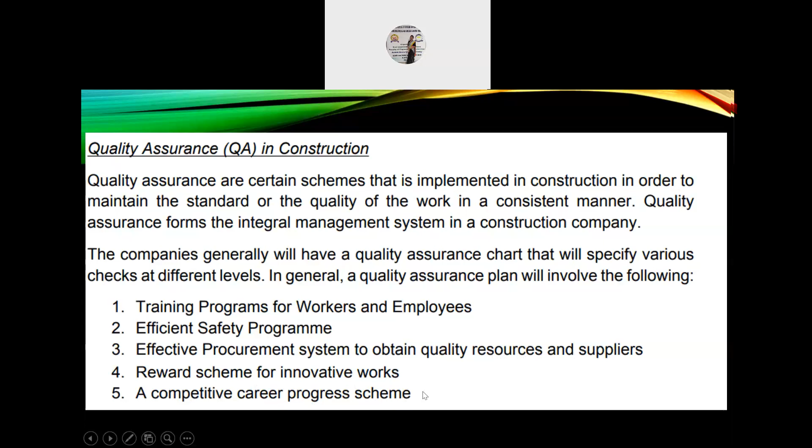Quality control in construction involves periodic inspection of the construction activities and facilities in order to meet the desired standardization as per the contract. Quality control is undergone by the team of QC engineers or specially trained teams. For example, quality control for compaction work conducted for a highway project is performed by measuring the soil density.

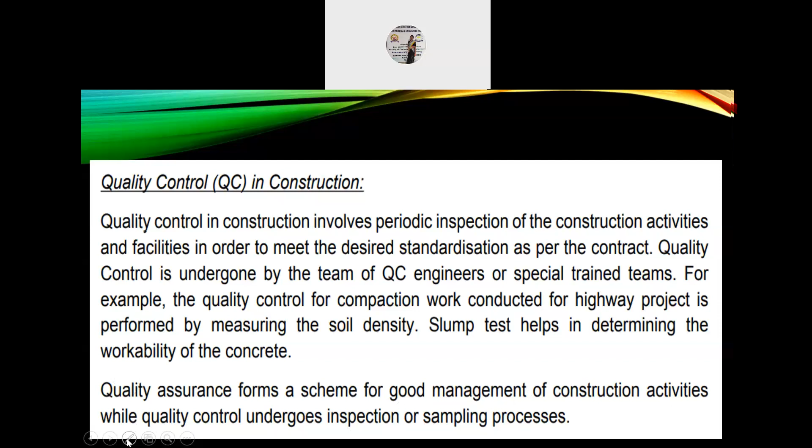Slump test helps in determining the workability of the concrete. Quality assurance forms a scheme for good management of construction activities, while quality control undergoes inspection or sampling processes.

Quality control focuses on these 4 points: setting and practicing specific standards for construction, determining the deviations from the standards, bringing in and taking corrective measures to reduce variation, and standard improvement with time.

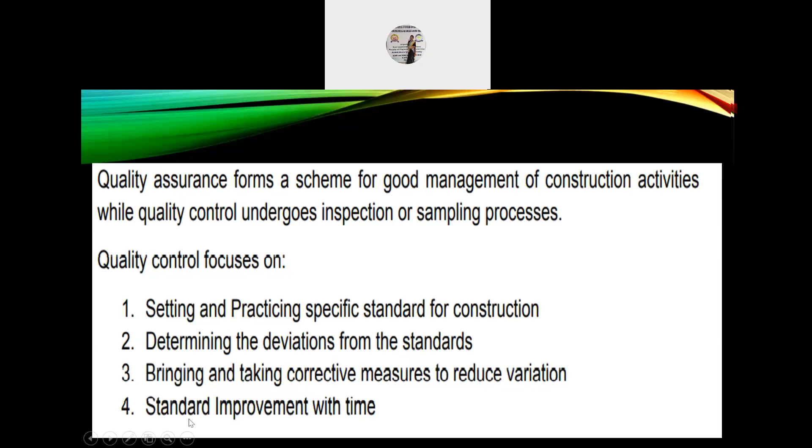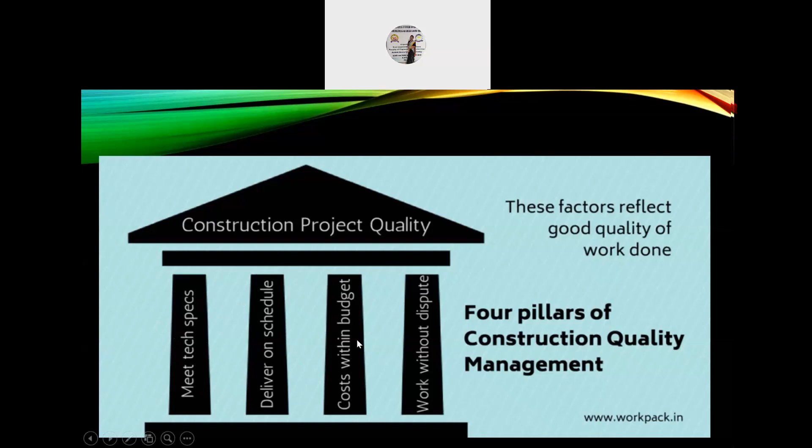The construction project quality has 4 pillars, and these factors reflect good quality of work that is to be done. The 4 pillars of construction quality management include meeting the technical specifications, delivery on time, cost within the estimated budget, and working without any argument or dispute.

User manuals and checklists for quality control. There are 5 elements of a quality control checklist that are vital in making them effective. Some are more obvious to importers, while others are often unknown or neglected. The 5 elements include product requirements, packaging requirements, on-site tests and checks, defect classification, and collaboration between the importer, supplier, and quality control staff.

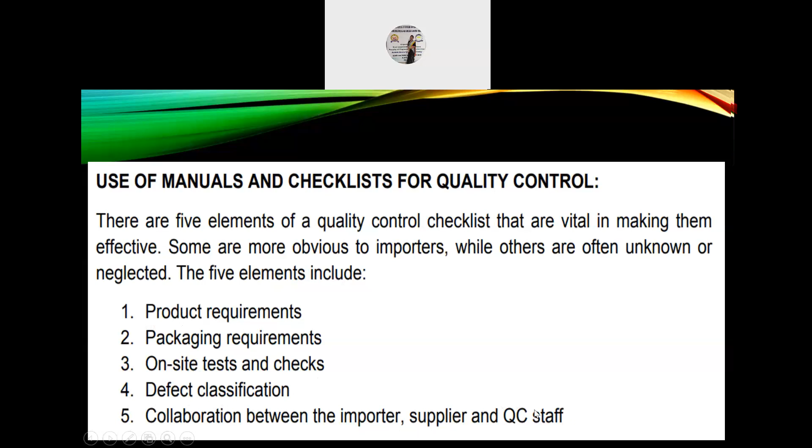Role of inspection. Inspection is one of the most important parts of quality control. It involves measuring, examining, and testing products, processes, and services against specified requirements to determine conformity. An inspection determines if the material or item is in proper quantity and condition. If done properly, it helps to a great extent in ensuring proper control on the quality of materials and products.

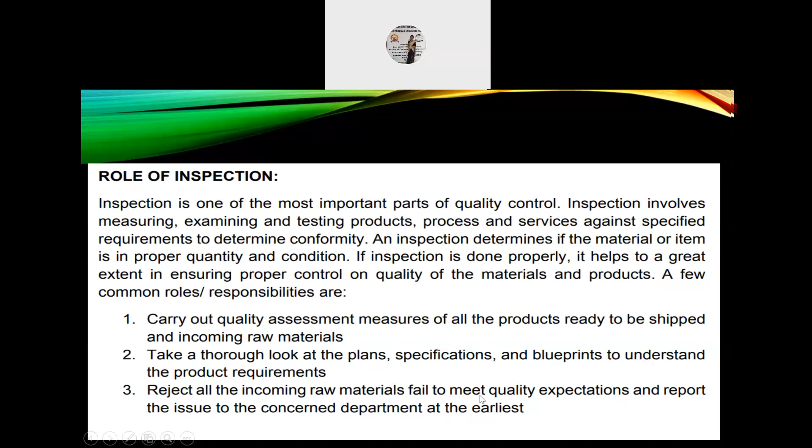A few common roles and responsibilities include carrying out quality assessment measures of all products ready to be shipped and incoming raw materials, taking a thorough look at the plans, specifications, and blueprints to understand product requirements, rejecting incoming raw materials that fail to meet quality expectations, and reporting the issue to the concerned department at the earliest.

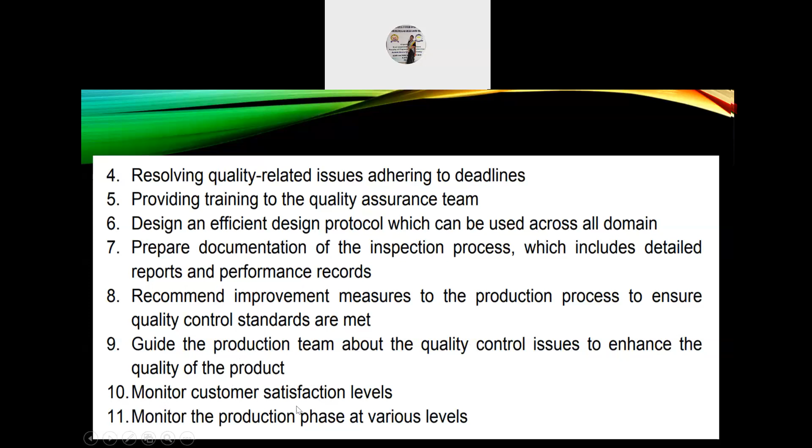In continuation: resolving quality-related issues, adhering to deadlines, providing training to the quality assurance team, designing an efficient design protocol which can be used across all domains, preparing documentation of the inspection process including detailed reports and performance records, recommending improvement measures to the production process to ensure quality control standards are met, guiding the production team about quality control issues to enhance product quality, monitoring customer satisfaction levels, and monitoring the production phase at various levels.

Quality control is dependent on quality assurance and quality management, that is QA and QM.

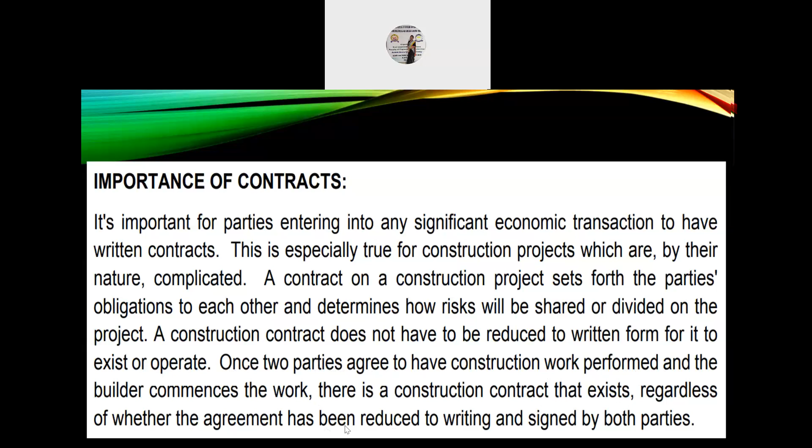A contract on a construction project sets forth the parties' obligations to each other and determines how risks will be shared or divided on the project. A construction contract does not have to be reduced to written form for it to exist or operate. Once two parties agree to have construction work performed and the builder commences the work, there is a construction contract that exists, regardless of whether the agreement has been reduced to writing and signed by both parties.

The key distinction between a contract that is in writing and one that is not is what terms control or define the parties' agreement. In a well-written contract, the written terms carefully and clearly define the parties' agreement, their expectations, and their respective risks and obligations. With a mere oral contract, there are no written terms, and the terms that control are defined by the parties' oral discussions or negotiation correspondence.

In the case of a dispute, the parties will invariably not agree on what those discussions were. So the course of performance of the contract, that is, how the parties performed the project work prior to the dispute, along with the limited default rights applicable by operation of law, become relevant.

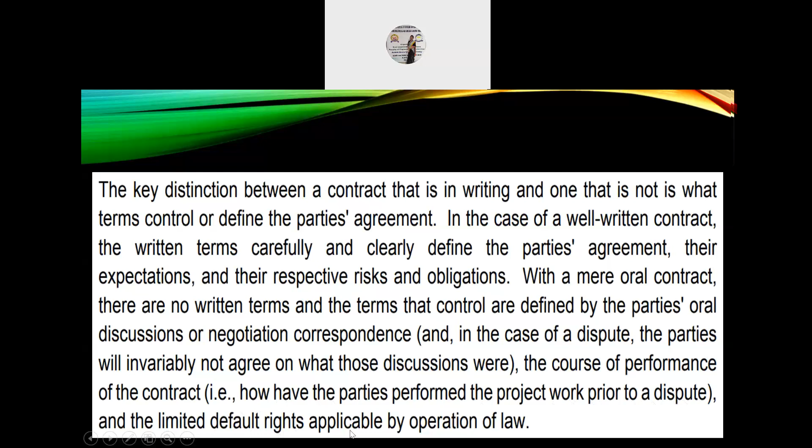One of the biggest problems with non-written contracts is that each party's memory of the agreement changes over time, especially if a dispute arises. Similarly, people are sometimes simply dishonest about the terms of the agreement when a dispute arises. Large sums of money are at stake, and a recollection different from the truth will improve their position. These problems can be mostly avoided with a written contract.

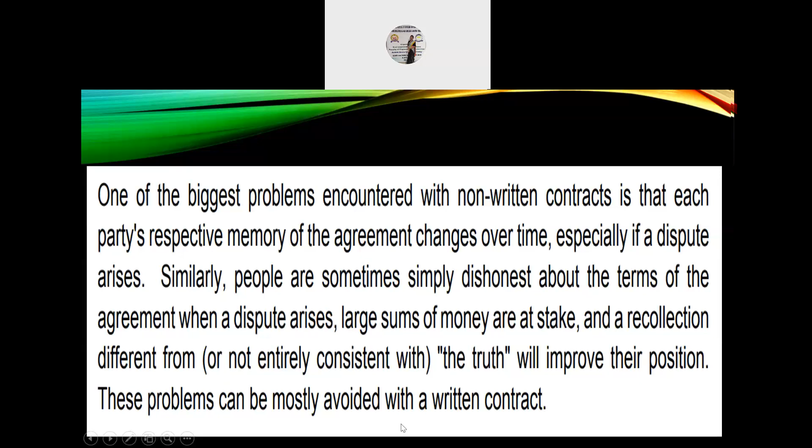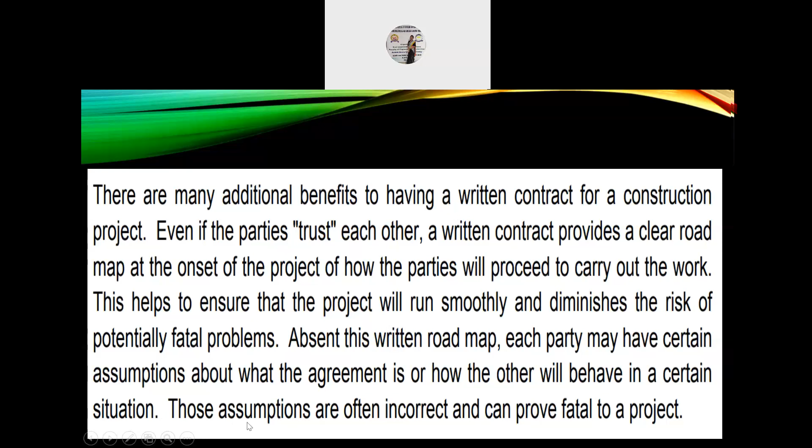There are many additional benefits to having a written contract for a construction project. Even if the parties trust each other, a written contract provides a clear roadmap at the onset of the project for how the parties will proceed to carry out the work. This helps ensure the project runs smoothly and diminishes the risk of potentially fatal problems. Absent this written roadmap, each party may have assumptions about the agreement or how the other will behave in a certain situation, and those assumptions are often incorrect and can prove fatal to a project.

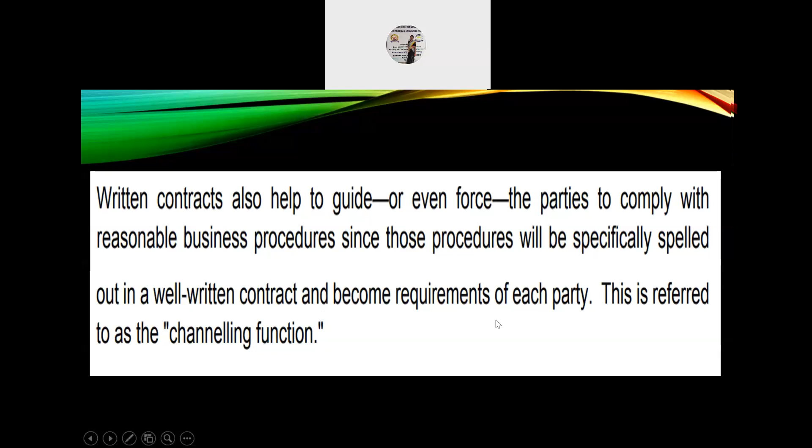Written contracts also help guide or even force the parties to comply with reasonable business procedures, since those procedures will be specifically spelled out in a well-written contract and become requirements of each party. This is referred to as the channeling function.

Another application of the channeling function is that a well-written construction contract forces the parties to consider and agree on issues they otherwise might not even contemplate at the beginning of a project, but that are commonly encountered in that particular type of project and could become major issues during performance.

Finally, if the parties do have a dispute, particularly if it ends up in litigation, the more terms that have been reduced to a clear written statement, the fewer terms will be genuinely in dispute. This leads to a more efficient, or at least less costly, resolution of the dispute, since there will be fewer issues to legitimately fight over.

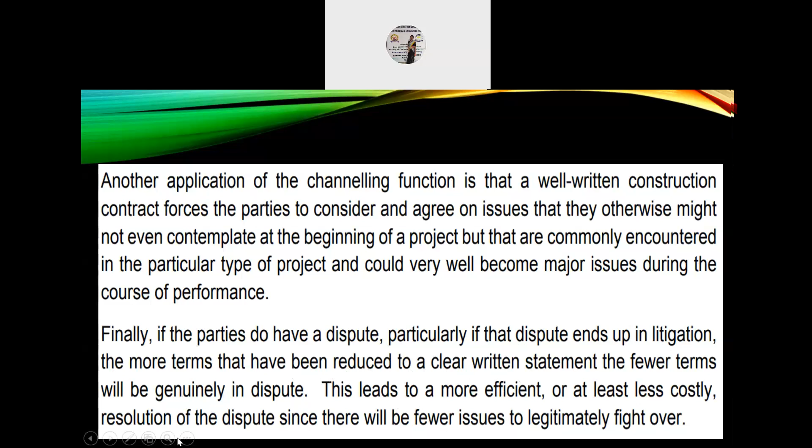Types of contracts. There are many types of contracts used in construction. Each type has its advantages and disadvantages concerning the owner and the contractor. They are categorized into two major groups as per the method of payment to the contractor. The following are the types of construction contracts generally used: lump sum contract, unit price contract, cost plus contract, and target cost contract.

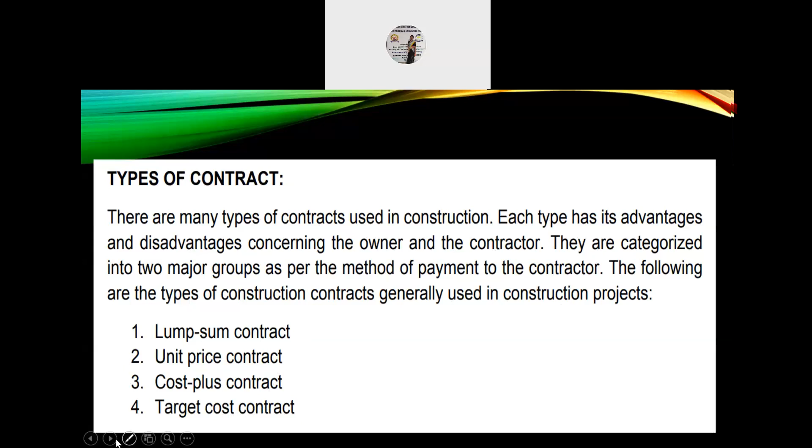Price-based construction contracts. Number 1, lump sum construction contract. In this type, the contractor bids a single fixed price for overall activities in the project scope. The contractor is responsible for estimating project costs from drawings and then adds overhead and profit to determine the value of the project. All risks are assigned to the contractor and there isn't any risk carried by the owner.

The contractor has an incentive in this contract as he is rewarded for an early finish and there is a penalty for a late finish. This contract is ideal when the project scope is well defined at the design stage, because there is limited flexibility for modifying the design during the construction period.

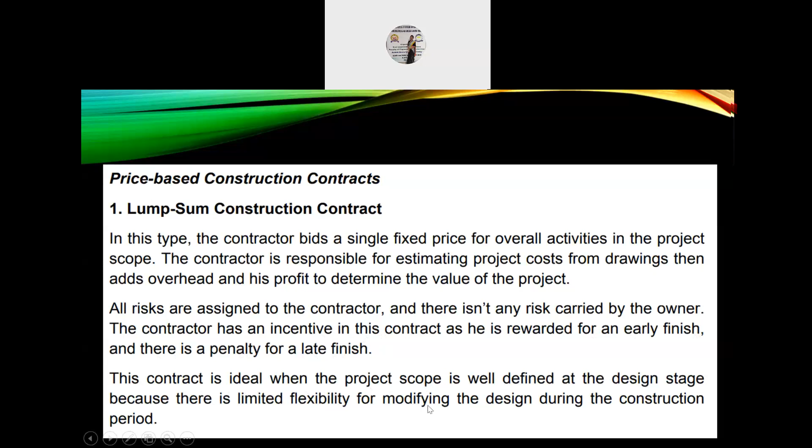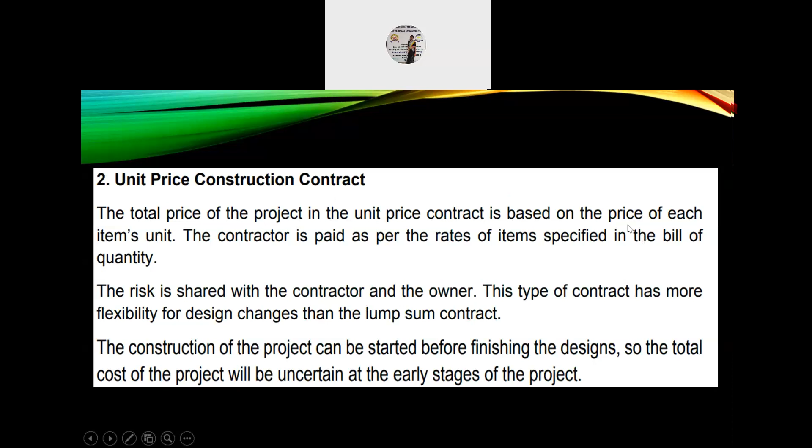Unit price construction contract. The total price of the project in the unit price contract is based on the price of each item's unit. The contractor is paid as per the rates of items specified in the bill of quantity. The risk is shared between the contractor and the owner. This type of contract has more flexibility for design changes than the lump sum contract. Construction can start before finishing the design, so the total cost of the project will be uncertain at early stages.